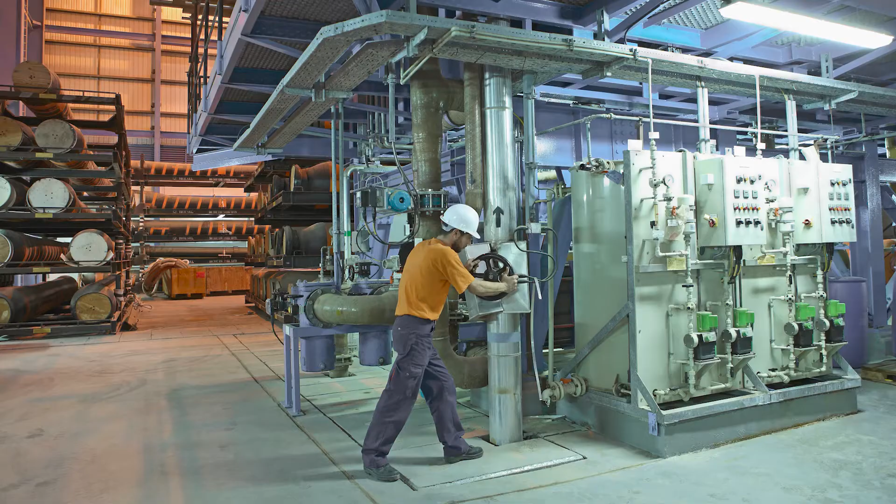Hello, my name is Greys Sosic, and I am a professor of operations and supply chain management in the Data Sciences and Operations Department at the Marshall School of Business. In my latest paper, I am exploring whether we can do desalination better by reducing the amount of concentrate that requires disposal and the amount of salt imports in the US.

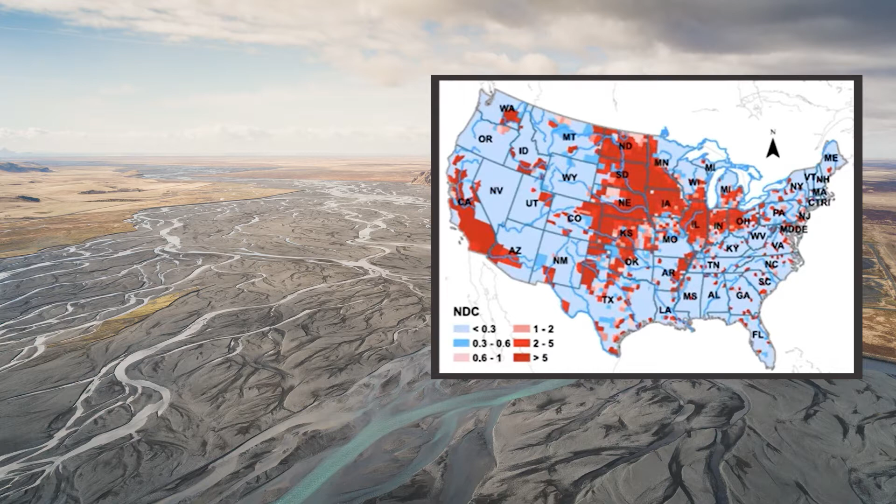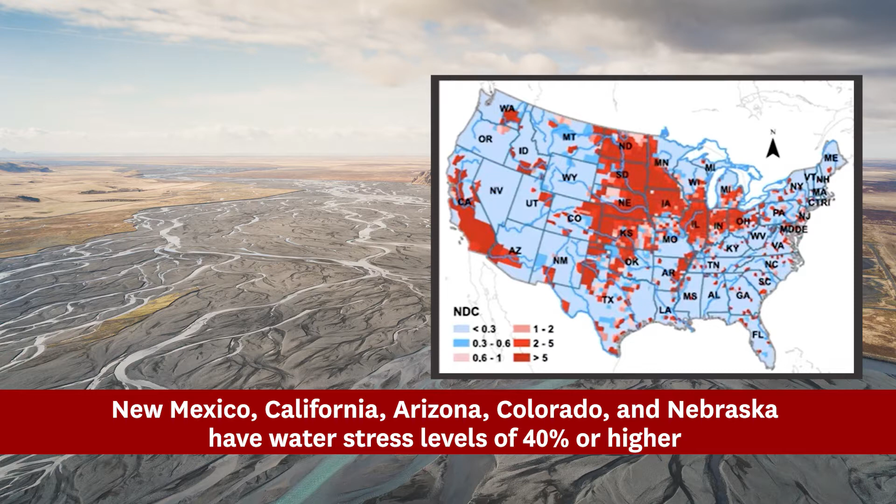Water scarcity has been a global problem for some time, and climate change is making it worse. Water stress, or the ratio between the demand for water and the available amount of water, is globally at 11%, but there are over 30 countries in which it exceeds 25%. What these numbers hide are the regional differences within a country. For instance, while the US has a water stress level of about 22%, several states like California or Arizona exhibit water stress of 40% or higher.

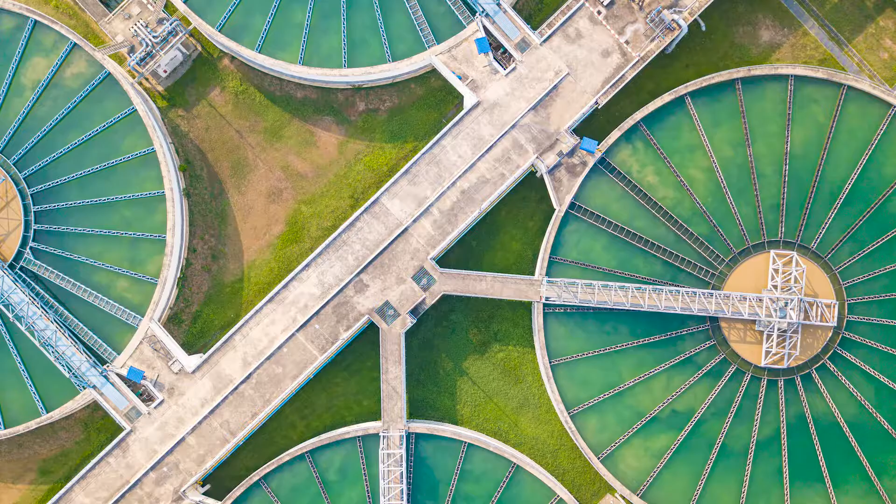As the world population continues to grow and temperatures rise, water availability is becoming ever more critical, and conventional water supplies that rely on easily accessible groundwater, rainfall, and snowfall are not sufficient to meet population needs. Several unconventional water sources, such as fog water harvesting, cloud seeding, water treatment and reuse, iceberg towing, and desalination, which will be our focus, are receiving more attention in recent years.

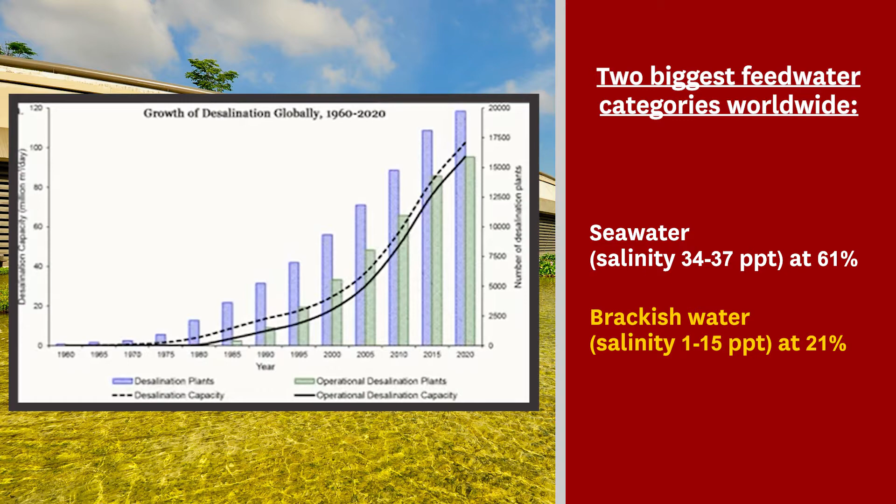In 2019, cumulative installed desalination capacity worldwide exceeded 28 billion gallons per day. Two of the biggest feedwater categories worldwide are seawater at 61% and brackish water at 21%. On average, salinities in the open ocean have ranged from about 34 to 37 parts per thousand, while brackish water can be defined as water containing between 1 and 15 parts per thousand.

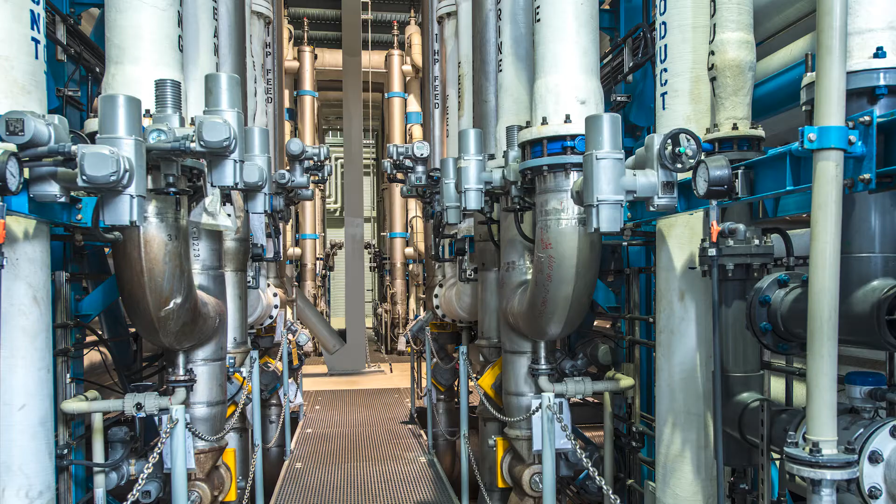In the US, 97% of desalination plants use brackish water, and only 3% of facilities treat seawater. While the most likely reason for this is the higher cost of seawater desalination due to its higher salinity, at the same time, we should also note that seawater represents a freshwater source of almost unlimited capacity, unlike brackish water.

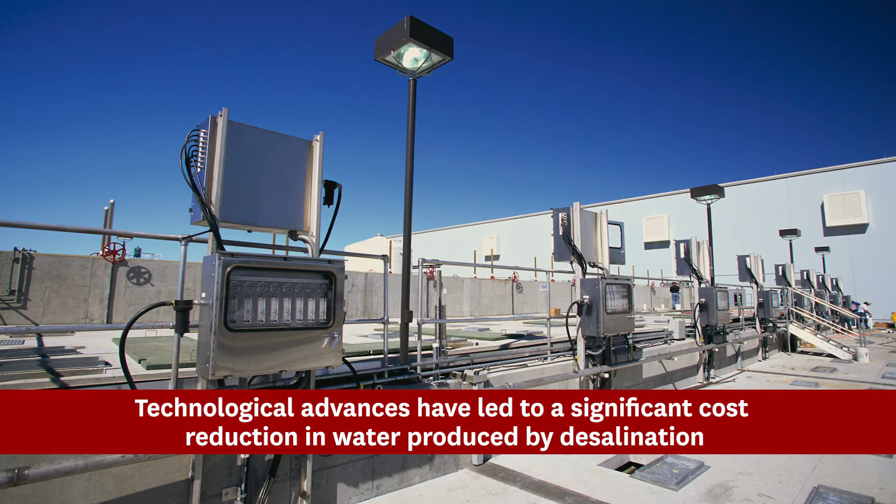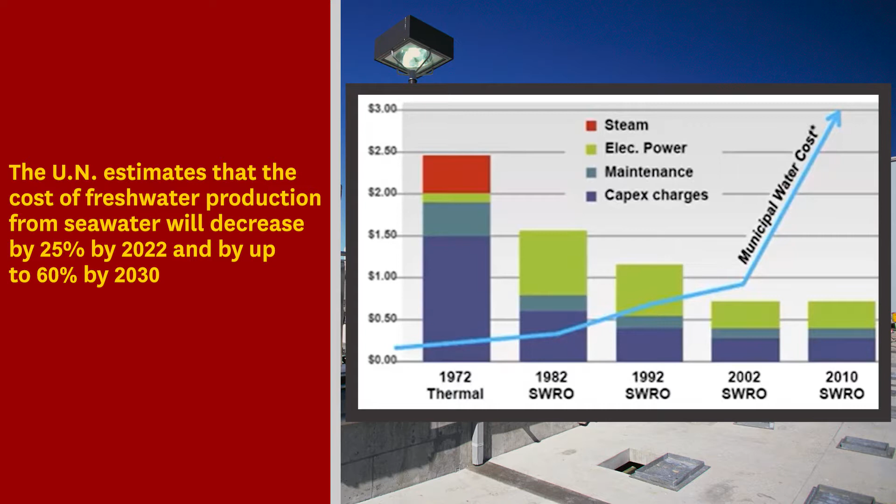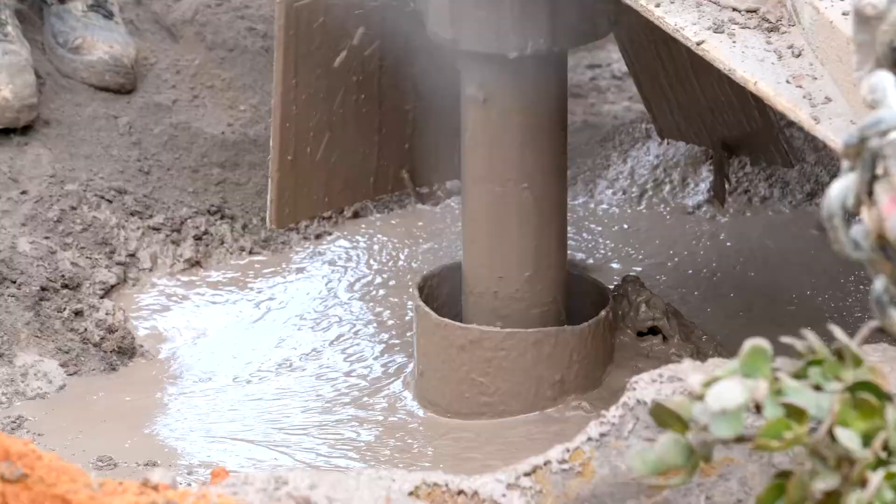Technological advances in recent years have led to a significant cost reduction in water produced by desalination, making this option more attractive. At the same time, more stringent regulatory requirements led to the increase in cost of conventional water treatment and reuse. Climate change impacts the availability of water supplies and may require water providers to pump groundwater from greater depths or move it over longer distances.

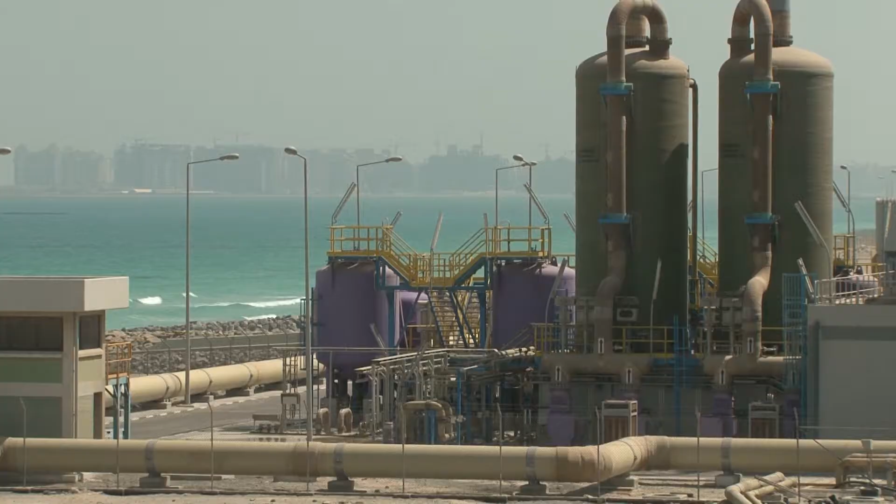As a result, the United Nations estimates that desalination is likely to be the most acceptable alternative water supply source in the majority of arid and semi-arid regions in the world. The growth in desalination has highlighted the need for cost-effective and environmentally acceptable techniques for freshwater extraction and residual concentrate management.

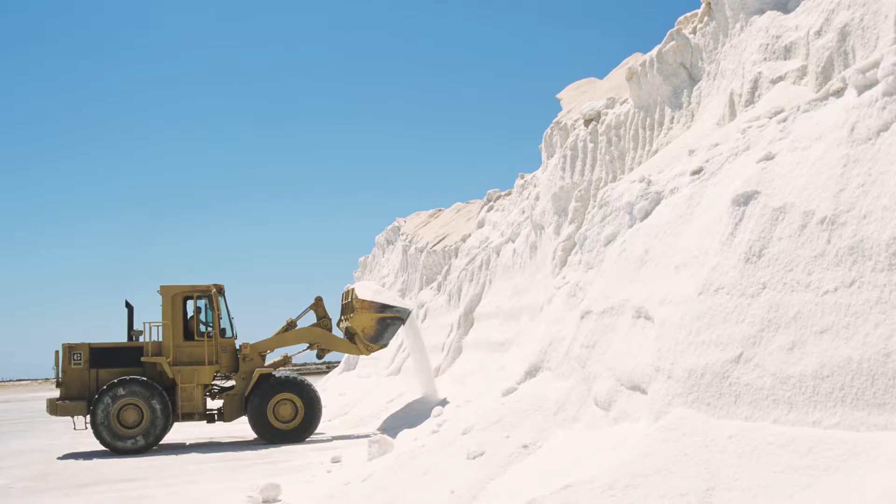At the same time, more than 290 million tons of salt are produced worldwide annually. In the US, production in 2019 was about 42 million tons, and over 16 million tons were imported. The biggest sources of imported salt were Chile, Canada, and Mexico. For salt consumption, the biggest categories are highway de-icing at 43% and chemical industry at 37%, with food processing using only 4% of salt consumed.

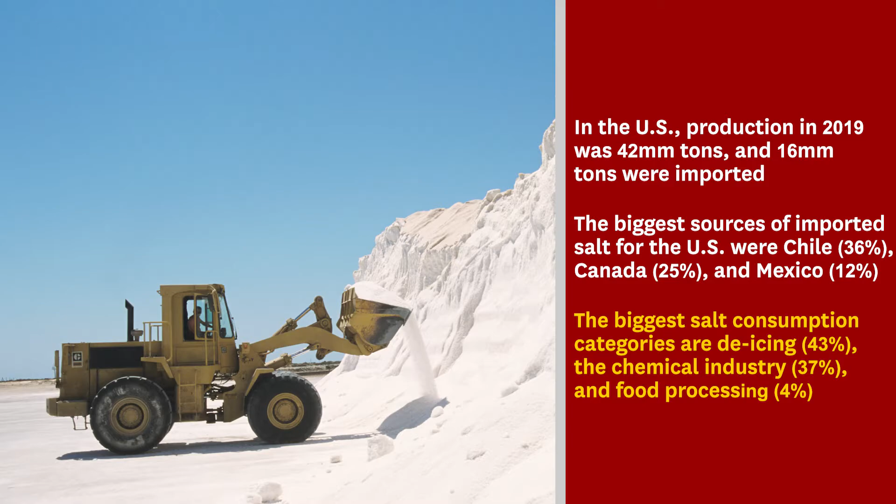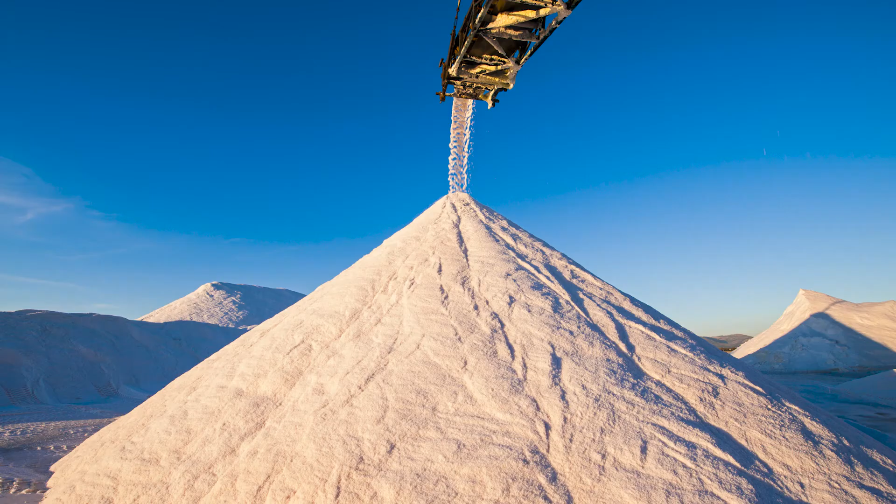Salt production costs can vary significantly. Solar salt production uses seawater in evaporation ponds, which then leaves behind salt. While this methodology requires large land areas for evaporation ponds, its energy requirements are low and reflected in the production cost of only $5 to $10 per ton of salt. Vacuum salt production is the costliest, as it requires higher equipment and energy costs, with production costs of $30 to $50 per ton of salt.

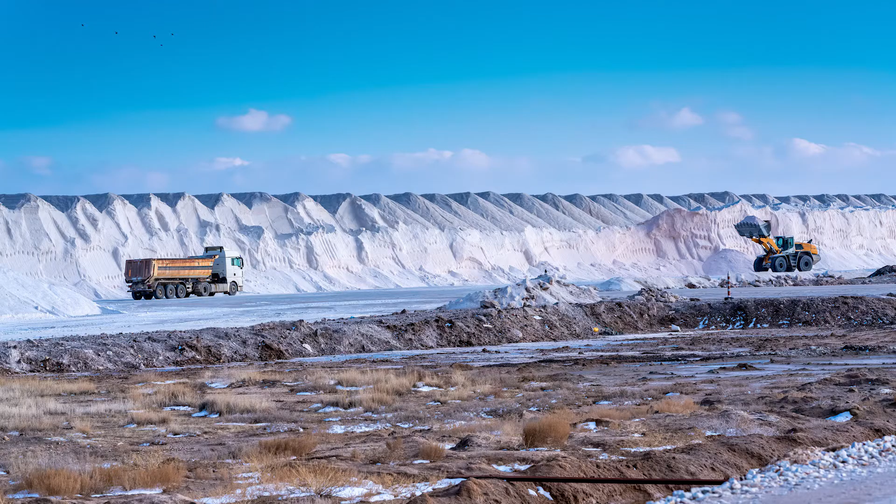These costs work if the salt is consumed close to the production site. To obtain actual consumer costs, these values have to be augmented by transportation costs, which can go from about 3 cents per ton mile by water up to almost 19 cents per ton mile by truck.

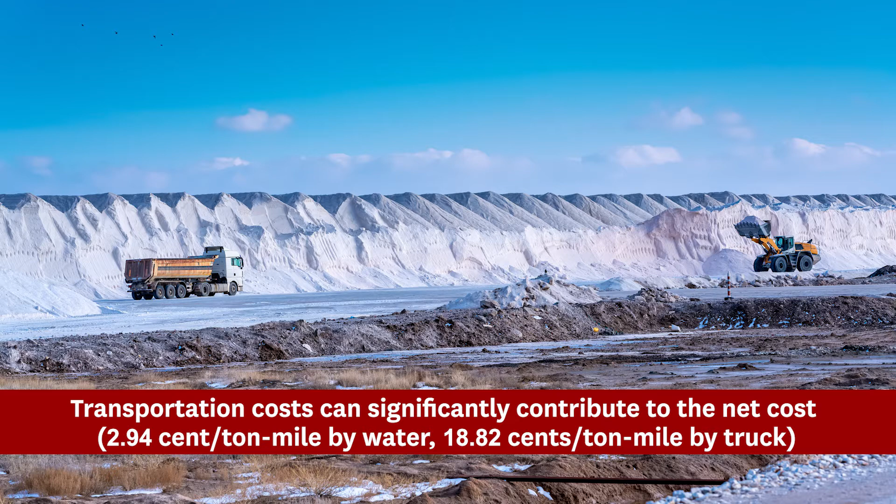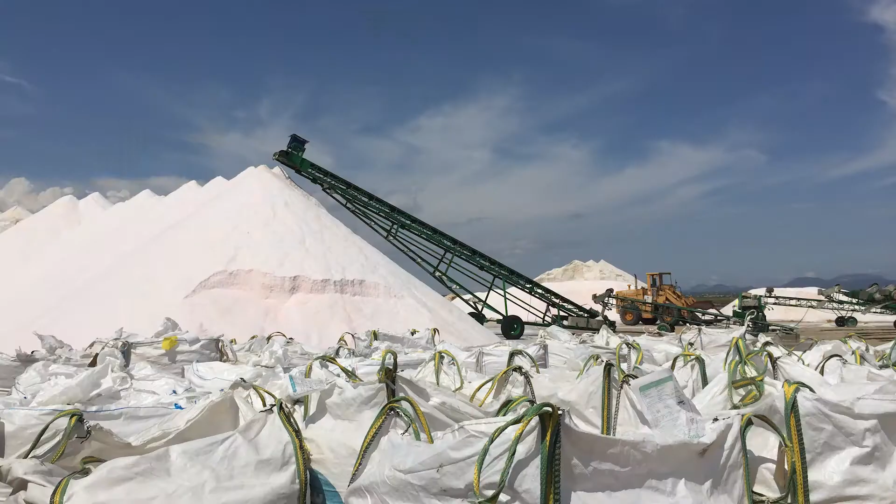What we do in this paper is first, we analyze existing desalination operations in the US. Next, we analyze current supply chains for importation of salt to the US. As previously mentioned, transportation costs can be a significant factor in the total cost of purchased salt, and locations that are further away from salt sources face higher salt prices. In this study, we focus on imported salt that must be transported over longer distances and thus implies higher costs, making it a potential candidate for replacement with co-produced salt.

Lastly, we look at the 3 states that currently host most of the US desalination facilities, California, Florida, and Texas, and we compare the energy requirements, costs, and greenhouse gas emissions for the status quo and for the salt freshwater co-production. We first discuss current water desalination operations in the US.

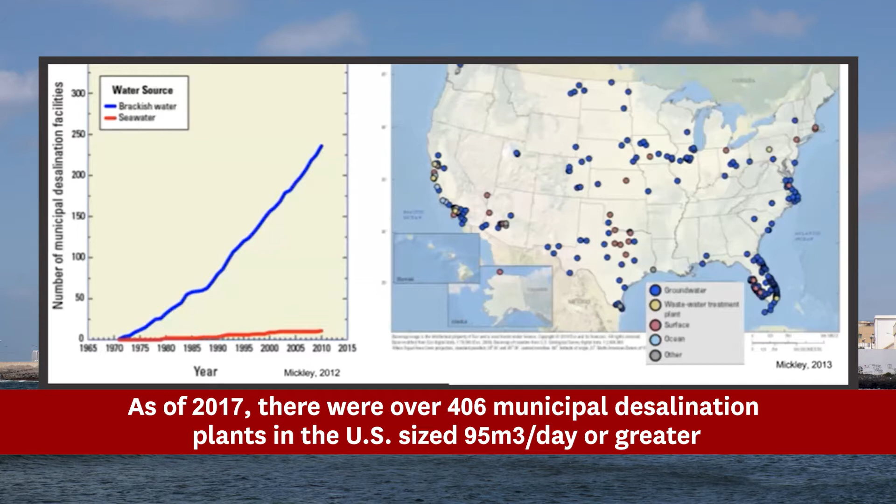As of 2017, there were over 400 municipal desalination plants in the US sized 95 cubic meters per day or greater, with 167 facilities located in Florida, 58 in California, and 52 in Texas. The average US desalination plant size tends to be rather small, although there are a few exceptions, most notably plants in Carlsbad, California, which processes seawater, and San Antonio, Texas, which processes brackish water.

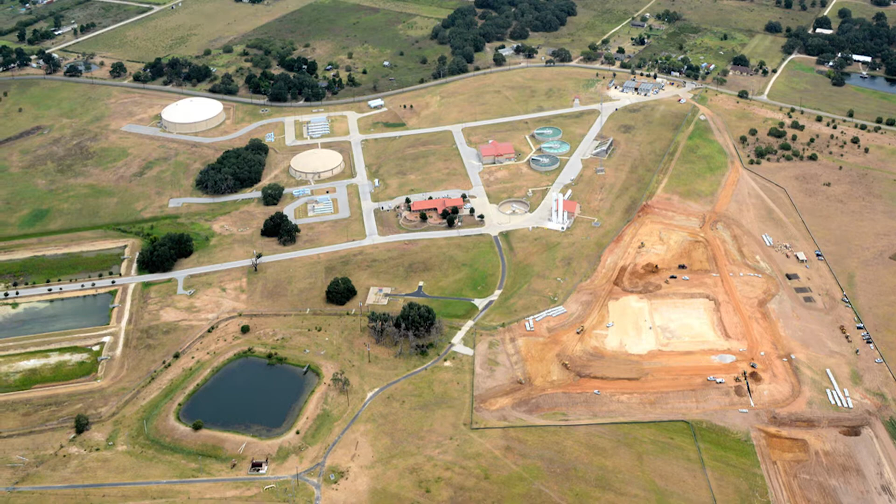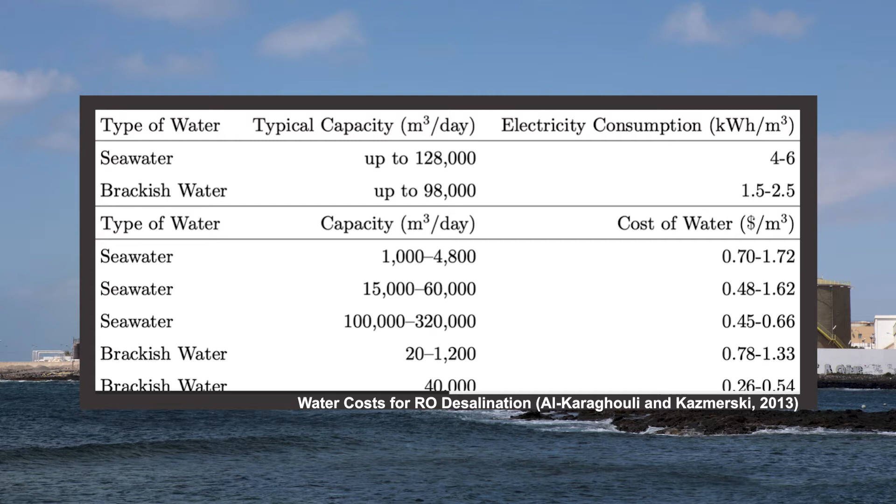The sizing is important because larger plants tend to achieve economies of scale, resulting in lower cost. These cost differences are illustrated in this table, where we can see that desalination of seawater requires more energy due to its higher salt content, and the prices per cubic meter tend to decrease with the plant capacity.

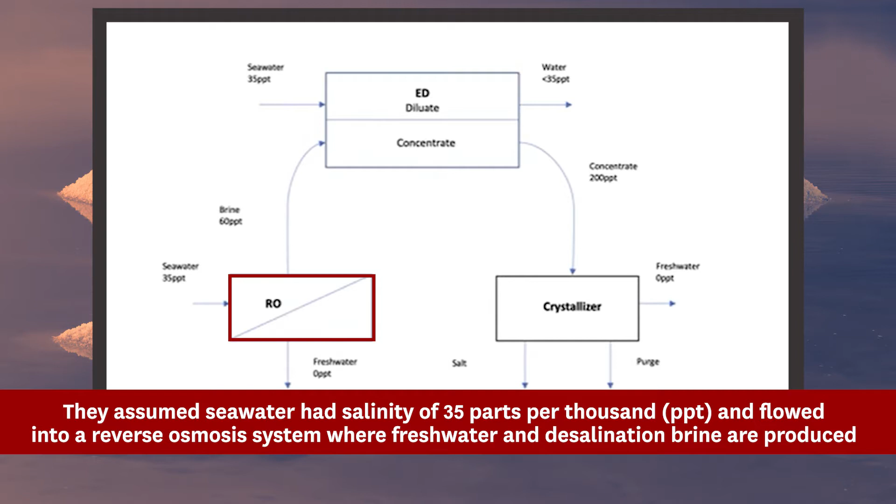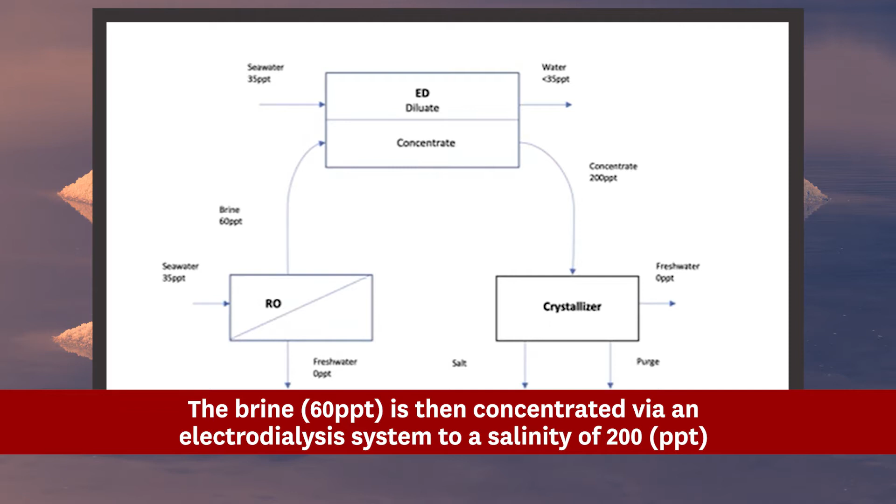For the production of salt and fresh water, we used the model developed by Nayar and his co-authors. They assumed that the seawater feed with salinity of 35 parts per thousand first flows into a reverse osmosis system, where freshwater and desalination brine are produced. The brine, with a 60 parts per thousand salinity, is then concentrated via an electrodialysis system to a salinity of 200 parts per thousand. The concentrate is sent to the crystallizer, where it is separated to pure salt, water, and purge.

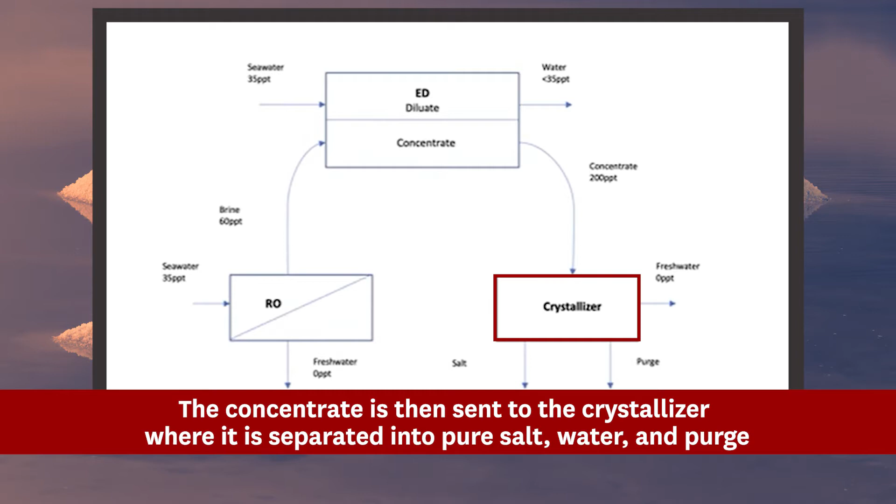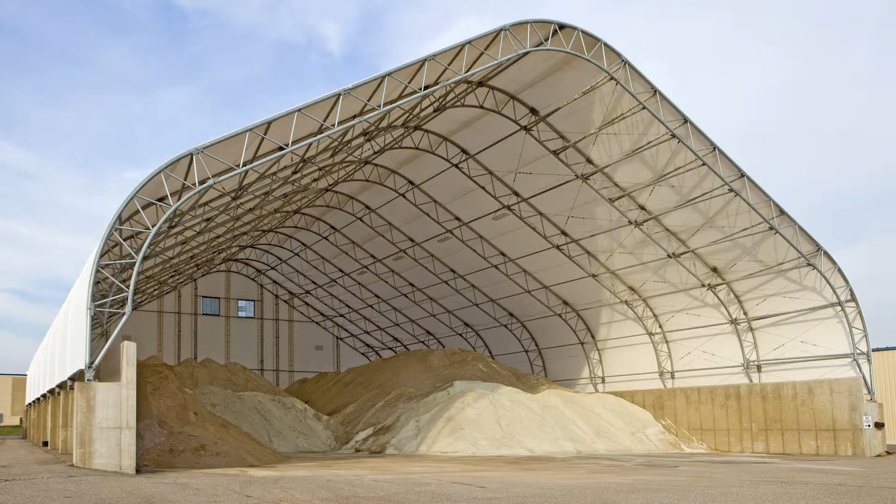Co-production could lead to significant reductions in requirements for concentrate disposal. While reverse osmosis seawater desalination requires proper disposal of about 58% of the intake volume in the form of concentrate, co-production requires disposal of only about 1.7% of the intake volume, or about 35 times less.

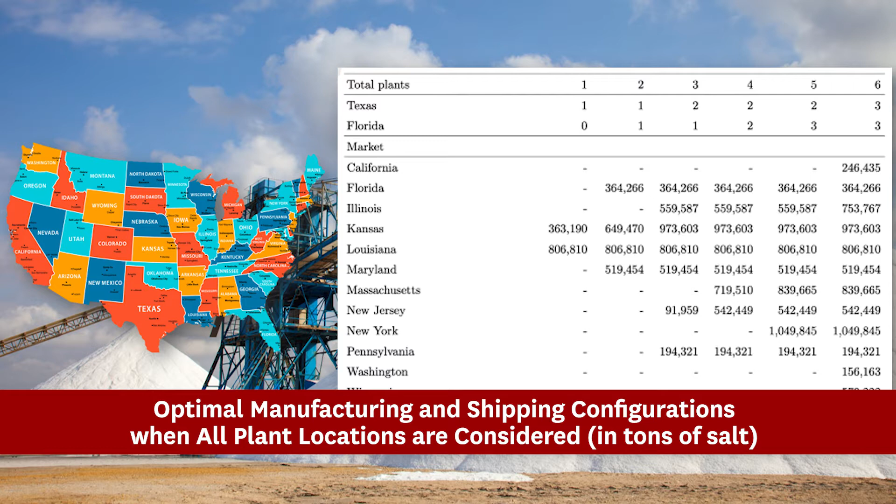In our model, we assume that no importing location will be willing to pay more for salt than what they are currently paying. We analyze the case in which we assume a federal level decision maker is choosing locations for co-production facilities and finds optimal configurations for different numbers of plants under consideration, ranging from a single plant to 8 possible plants. Our analysis indicates that the maximum number of plants that are feasible in this case is 6. If we want to sell all co-produced salt with more than 6 plants, we have negative revenue for some plant-market pairs.

California is never chosen as a co-production plant location, as it is located further from demand points in the remaining 2 states, thus leading to less competitive shipping rates.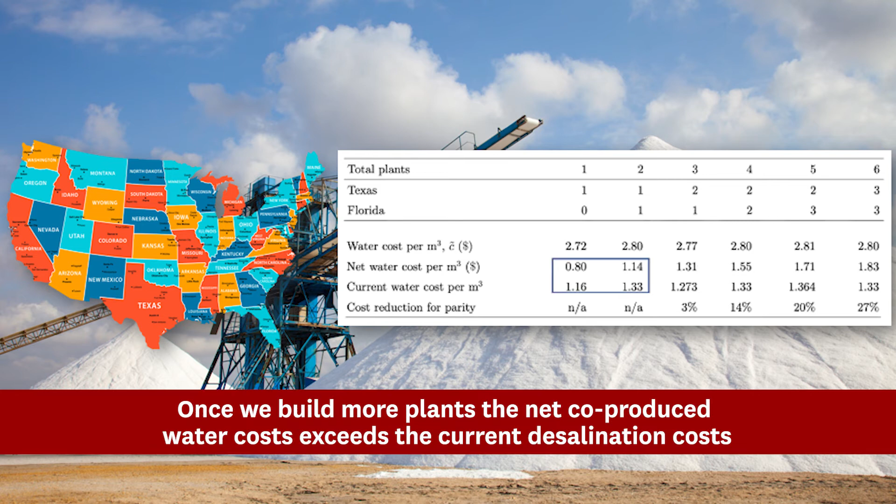Building one facility in Texas, or one in Florida and one in Texas, leads to the water cost below the current average desalination cost. However, once we build more plants, the net co-produced water cost exceeds the current desalination cost.

As the ocean has an almost unlimited capacity for desalination, these options might become attractive as water becomes even scarcer and water prices increase, while at the same time co-production costs might decrease due to technology advancements and implementation of a carbon tax.

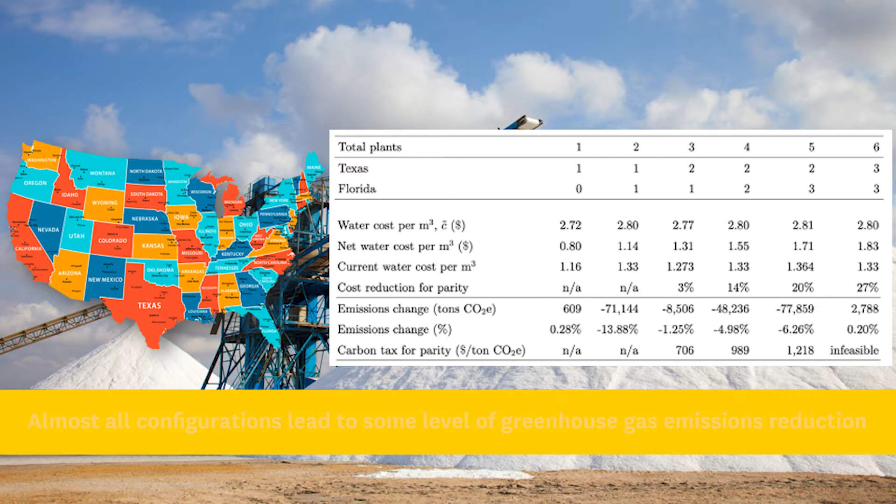Almost all of the configurations lead to some level of greenhouse gas emissions reduction. As a result, introduction of a federal carbon penalty legislation can lead to a further decrease in net water prices. However, once we build 3 or more plants, a very high carbon tax would be required to induce cost parity.

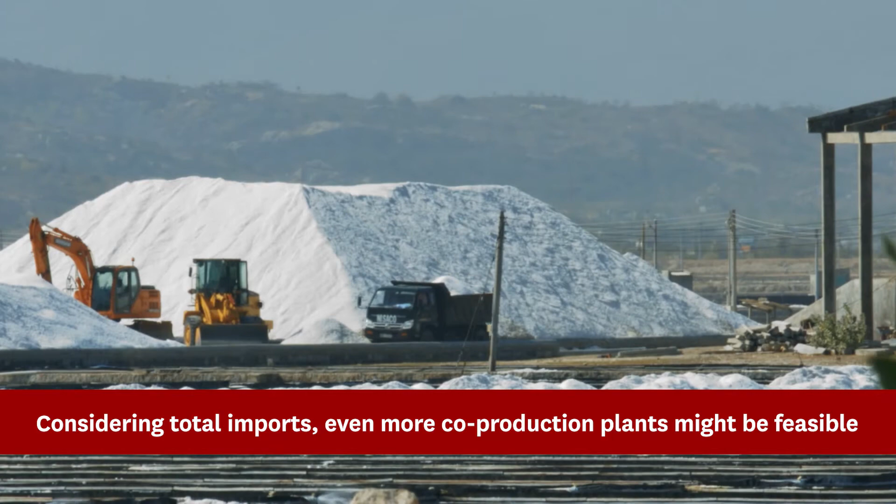In our analysis, the total demand for imported salt considered is about 1/2 of current US imports. Extending the analysis by considering total imports may indicate that even more co-production plants might be currently feasible.

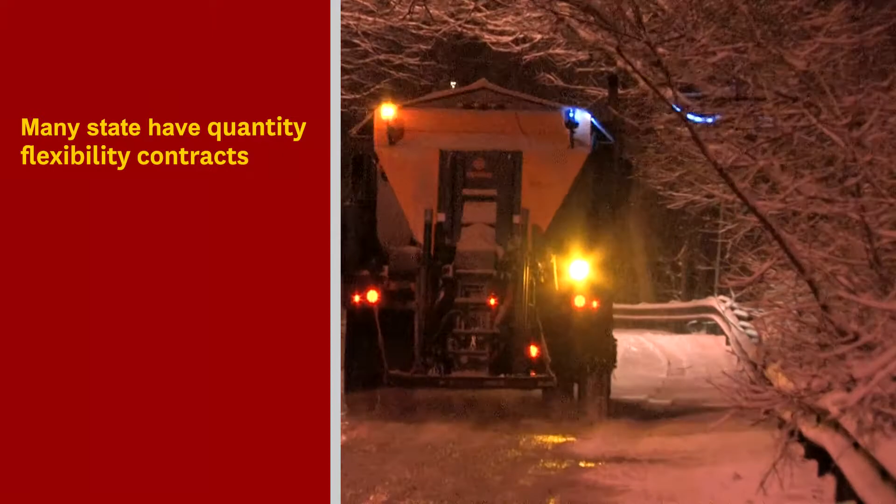One important element not included in our analysis is the change in required inventory levels if imported salt is replaced by co-produced salt. While demand for many salt types can be rather stable, this is usually not the case for road salt. For this reason, many states have quantity flexibility contracts with their salt suppliers that require the suppliers to keep extra inventory. At the same time, the states have the option to not purchase the entire contracted quantity.

As an example, salt users in New York State are obligated to take at least 70% of their order quantity, while contractors are obligated to deliver up to 150% of the order within a specified time window.

Our analysis of ocean shipments from Chile and Mexico to the US East Coast indicates that the ocean portion of the trip takes between 17 and 21 days. Thus, suppliers in states that rely heavily on imported salt from Mexico and Chile may need to keep high inventory levels due to long lead times.

When considering rail shipments of co-produced salt from Houston, the travel time varies between 3 and 18 days with an average of 10 days. Similarly, the travel time from Miami varies from 6 to 12 days with the average time of 10 days again. Hence, the use of co-produced salt can lead to lower inventory levels, on average between 30 and 40%.

Recall that we mentioned that 43% of the US salt is used for de-icing. Thus, this inventory reduction can further reduce the cost of the co-production option and make it more attractive.

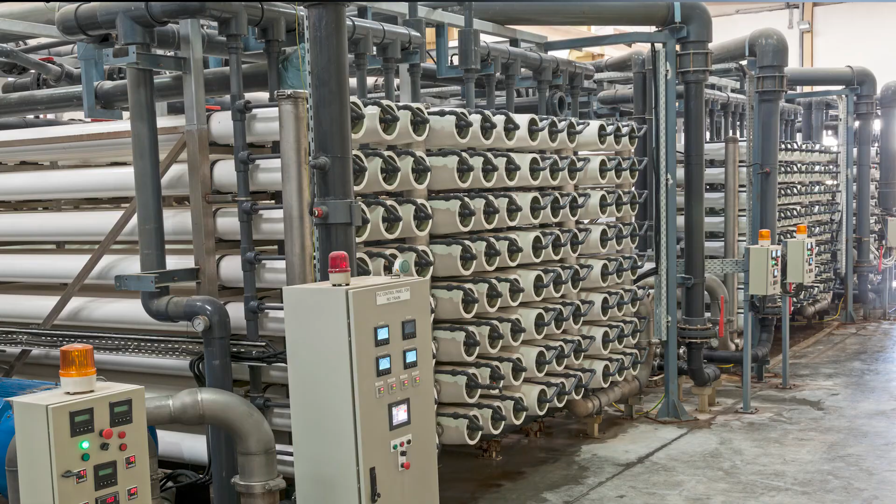In summary, our analysis indicates that building a small number of strategically located co-production plants in the US that would sell co-produced salt to states that are currently importing salt would result in a decrease of the net cost of desalinated fresh water. The results become even more positive if we account for potential reduction in inventory levels of road salt and if a federal carbon tax is implemented, in which case building more plants could be both feasible and financially more attractive. This fact is even more important when we take into account freshwater scarcity and seawater abundance.

We hope that our findings are useful for government and corporate decision makers when considering the type and the location of desalination facilities to build, as well as the environmental policies that are implemented. For instance, while building co-production facilities in California is not financially justified at the moment, it would be environmentally beneficial as it leads to reduction in greenhouse gas emissions. Moreover, it might be financially attractive in the near future due to increased water scarcity in the region.

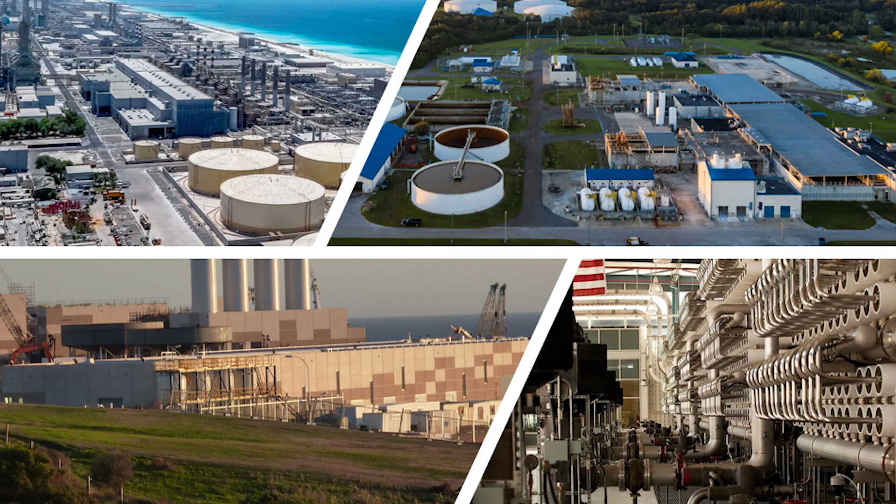On the other hand, due to its central location, Texas is the state that achieves the lowest net water cost from co-production, but building such facilities in Texas increases greenhouse gas emission and has negative environmental impact. At this point in time, locating co-production plants in both Texas and Florida leads to both environmental and financial benefits.